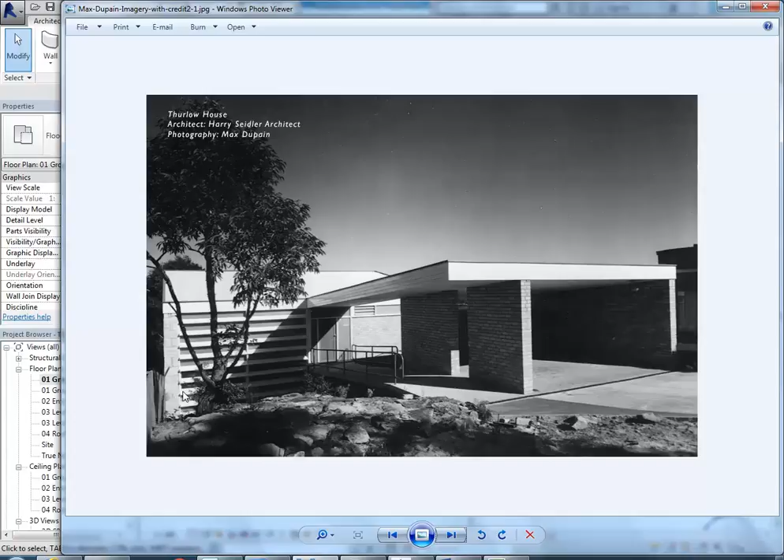Okay, so here I've got the ground floor plan where you'll see there's a curtain wall up against that living space that is different to all the others. So I'm going to make a new curtain wall type for that.

But then the curtain walls that you have adjacent to that can be used, or can be done using that curtain wall that we made right at the beginning, that Seidler wall, because it's just a plain wall with a frame going around it, and we can add the frames in.

So make sure you've got that wall type set up, and then when you go to the wall tool, you can choose that Seidler curtain wall.

If you haven't already made that one, I'll just show you the setup. So by going to edit type there, you'll see - actually if you did it earlier, I did originally have some settings in there for the vertical grid and the horizontal grid, but I've taken those out.

So make sure they're both set to none, and then the mullions need to all be set to the 50 by 150, not the new thinner one that we used.

So this one has a bigger frame. That's the setup for it, and so that's the name, Seidler curtain wall. You'll need to use duplicate to make that if you haven't done that already.

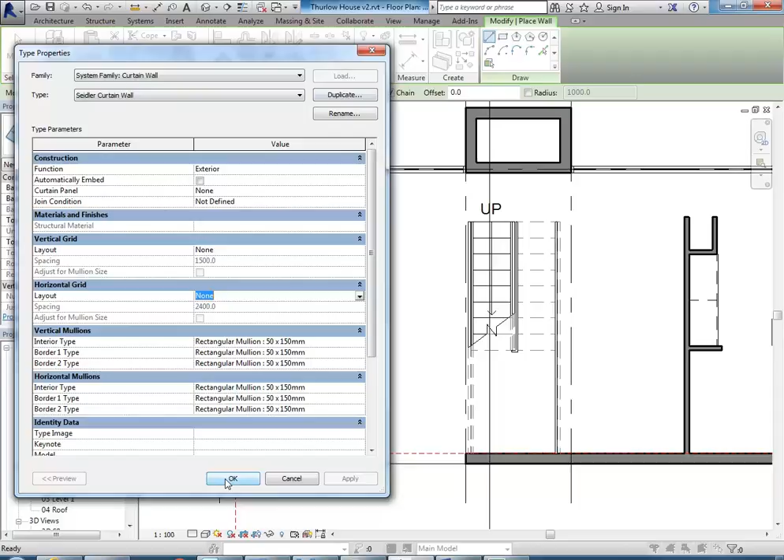And I'm going to set the height there up to 04 roof, and then I've got my top offset there on -150, so I'm going to make that 0 as well.

Which top offset? In properties. Top offset. Mine's at 0, is it? So you might not have changed yours.

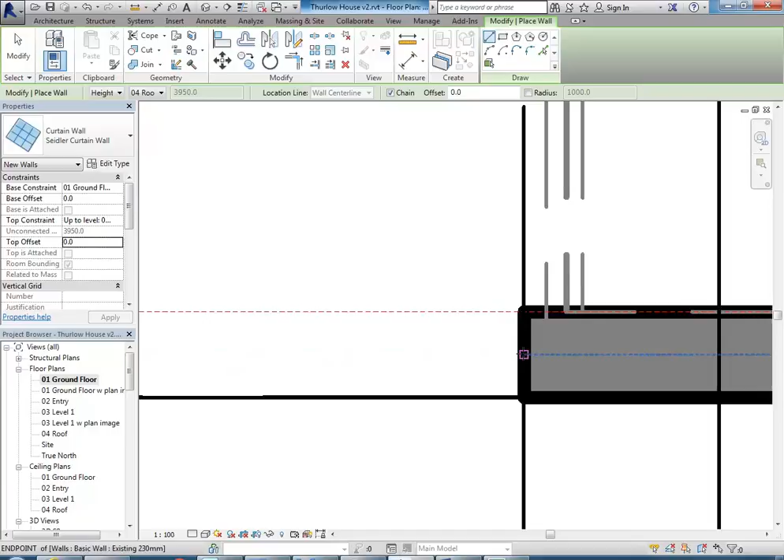So that's it. And so I'm going to start on the middle of this wall over here next to the entry, and then come across to the left all the way up to the wall at the edge, not almost on the edge.

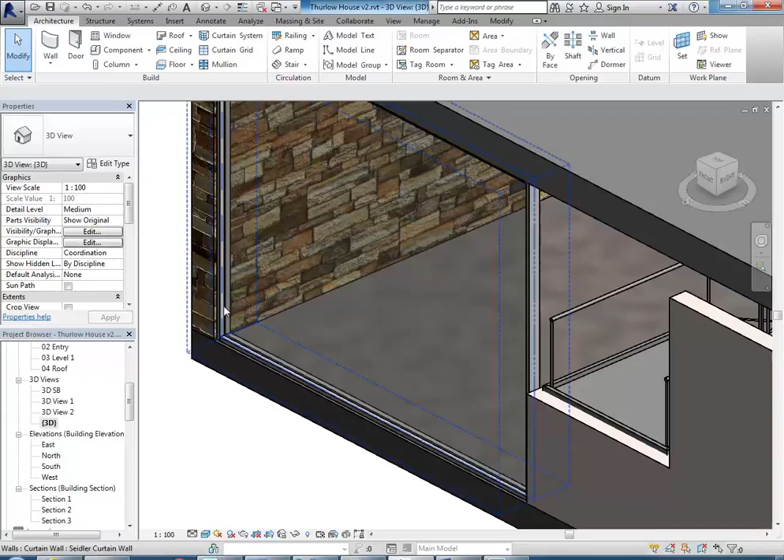So I'll show you then in the 3D view. At the moment it's just a plain glass panel with the frame going around, and so I'll put in those other panels afterwards, just in a moment.

But before I do that, I'll do the others. So the next one, I'm going to go to the entry level, and now I can see the curtain wall I've just made, and I can go back to the wall tool.

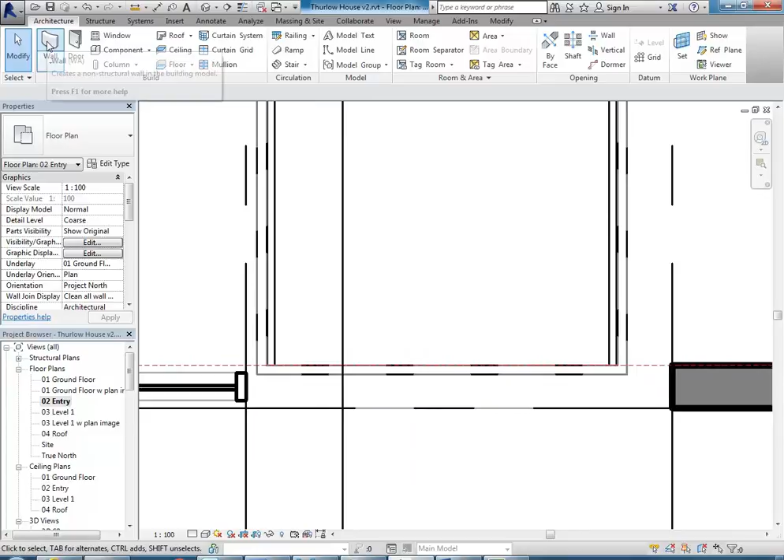And this time I can leave it on - sorry, I'll check the height there, so I'm going to make sure the height goes up to 04 roof, and then going from the middle of the wall over there on the right, and then across to the left up to that curtain wall I've just drawn.

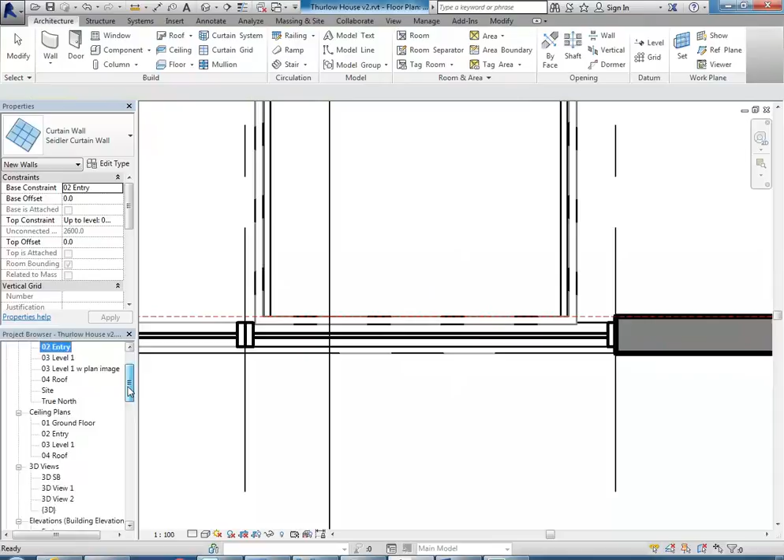So again, now looking in the 3D view, you can see again it's also a plain panel with frame around it, but it starts up higher because I've started on that entry level. So you started on the entry level. Yep.

Oh yeah, so just check your properties. So if you just go into edit type, just make sure you've got the horizontal grid and the vertical grid both set to none. If you have any options in there, it'll...

So if base constraint is level 02 entry - does that mean that's where it finishes at the bottom? Yeah, that's where it starts. Or starts, and then goes up, and then you change the top to 04 roof? Yeah, that's right.

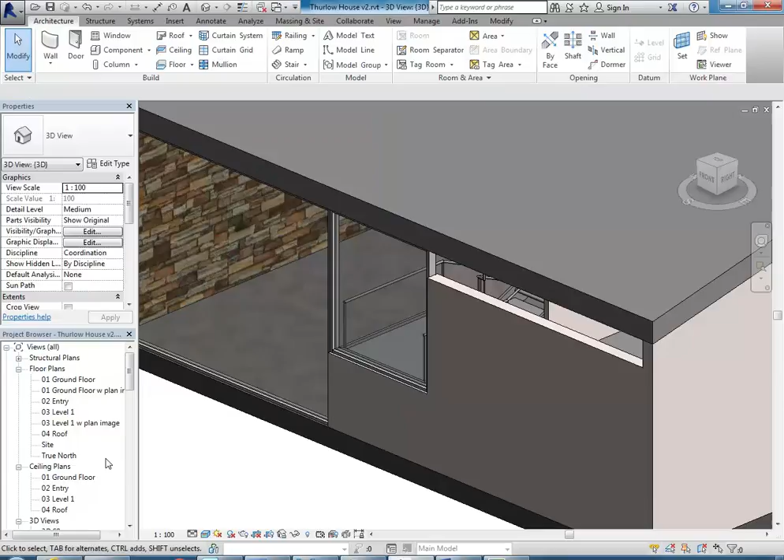Okay, so now I'm just going to look in my south elevation to check the height. Ooh. Yep, 2100. That doesn't touch the roof, but I put it to level 3.

Okay, never mind. Oh, you might need to check the height. But you can adjust that afterwards, as long as it's basically in the right place.

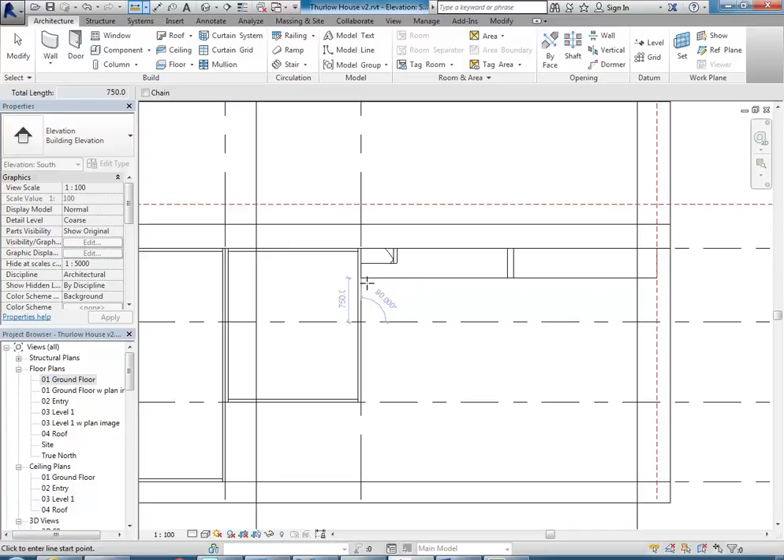Okay, so this next one, well, it's really a window, but we're going to use this curtain wall tool for it as well. It's 2100 above the entry level, but 750 above level 1.

So I'm going to go to level 1, and then using the wall tool, this time I'll put in a base offset of 750.

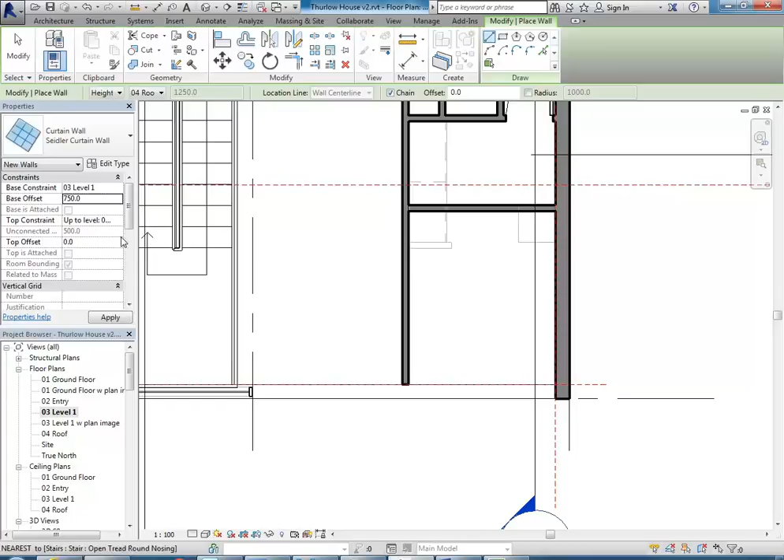And then to make it easier to line up, I'm going to draw it from the left this time. So it's really important there that it's right on the centre of the mullion, not the centre of the glass. The centre of the glass is just a bit below that, but the centre of the mullion should be an endpoint there.

And then as you go to the right, you'll see the glass is going to the other side. So you have to press space to flip it to the right side so it lines up with the glass from the previous wall.

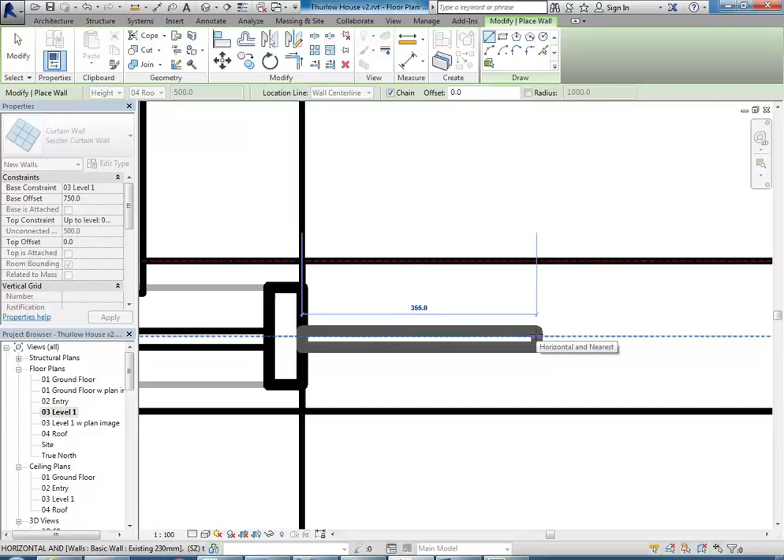And then I'm going to go all the way across to this wall here. So hopefully you can see why it's easier to draw it that way, because there was no middle for me to get on that side. So left to right is the easiest way to draw it, but just need to remember to use space to flip it.

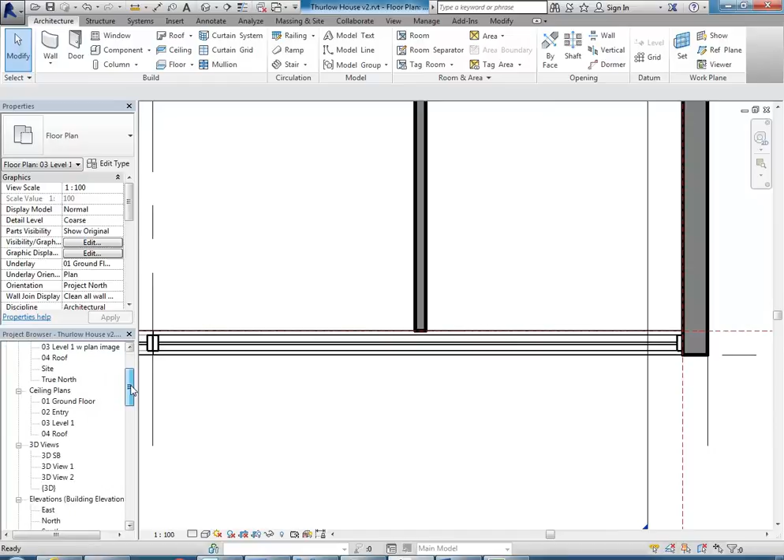So yeah, this is the - well, it's above the kitchen. It's way above that level. So it's really a window at the top of that wall. Yeah.

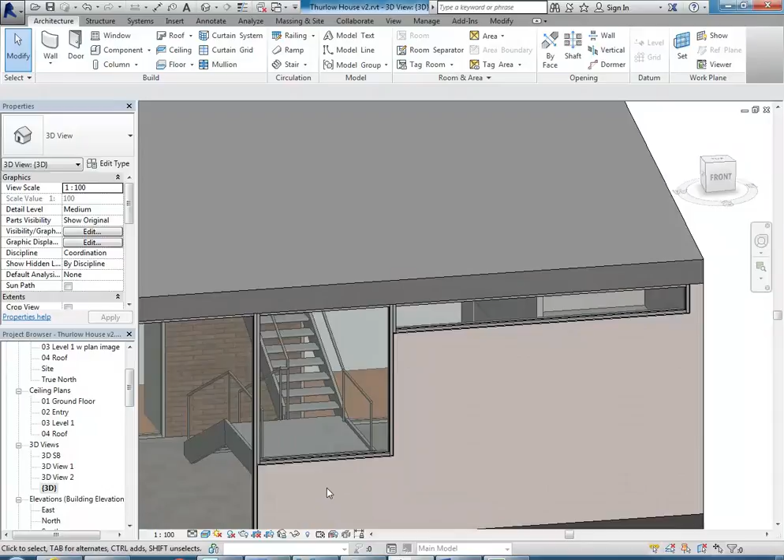Level 1 with the base offset 150. Oh, sorry, yes, right, 750. Yes, but I'll do it.

And so once you've done that, then you can use the grid tool to put in the extra divisions that you need.

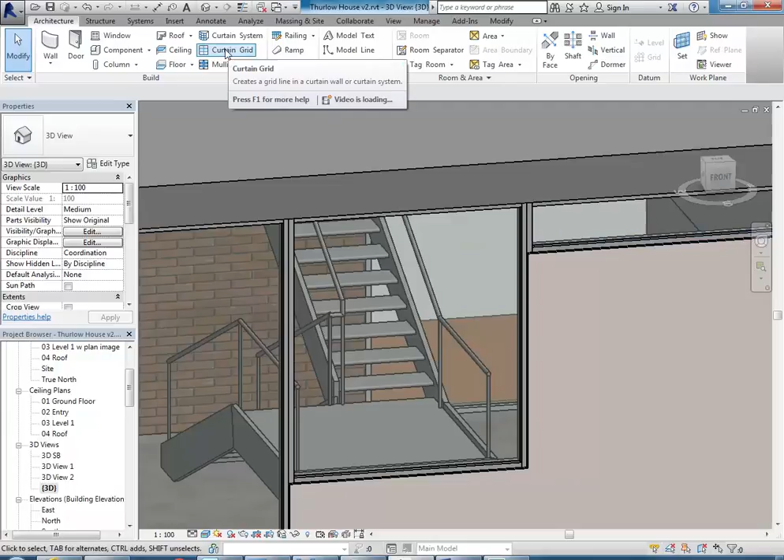So, using curtain grid, I'm just going to place it roughly in line with the other one. You can see there it's just gone a little bit below where it needs to, so I'll bring that up in a minute. But as you've done before with the grid tool, generally you can just place them roughly where they need to go and then fine-tune the measurements afterwards.

So now I need 2 vertical grids. And notice also with this one, it's putting a mullion on automatically because that's all been set up in the wall properties.

So here I'm going to change it from all segments to 1 segment. And then just choose 2 sides of my door.

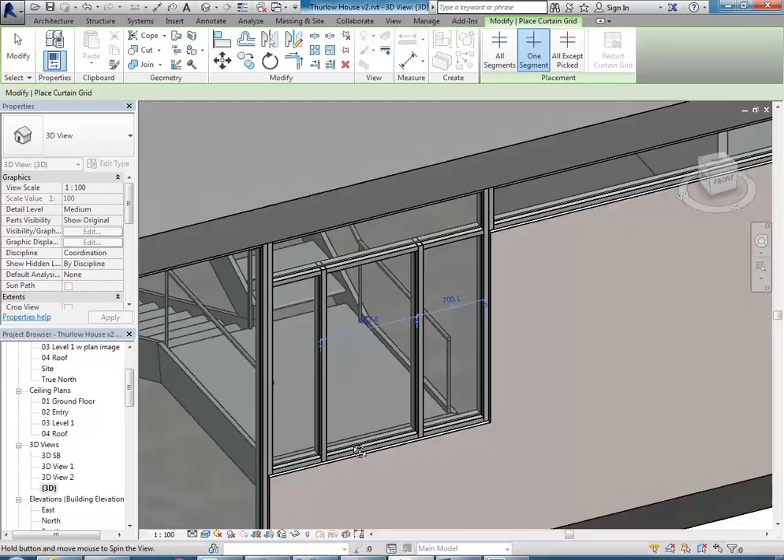And then we've got another one up here for, well, for the vent really. Something like that.

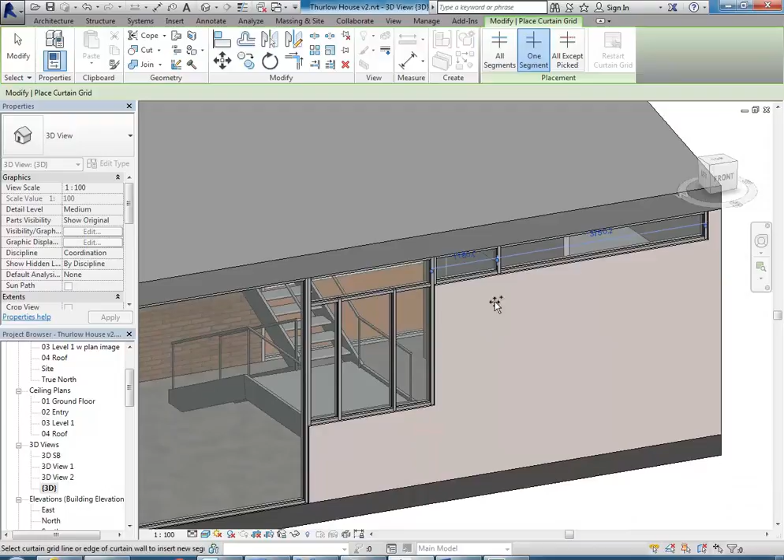And you can change the measurements as you go, or you can press escape and then come back to any, well, over the mullion, and without clicking anywhere, if you press tab, if you're in the right place to find the grid, it'll pick it up, but sometimes you just need to move the cursor around to find it, and I'm having trouble there finding it. Oh, there it is. Okay, so I've finally got it.

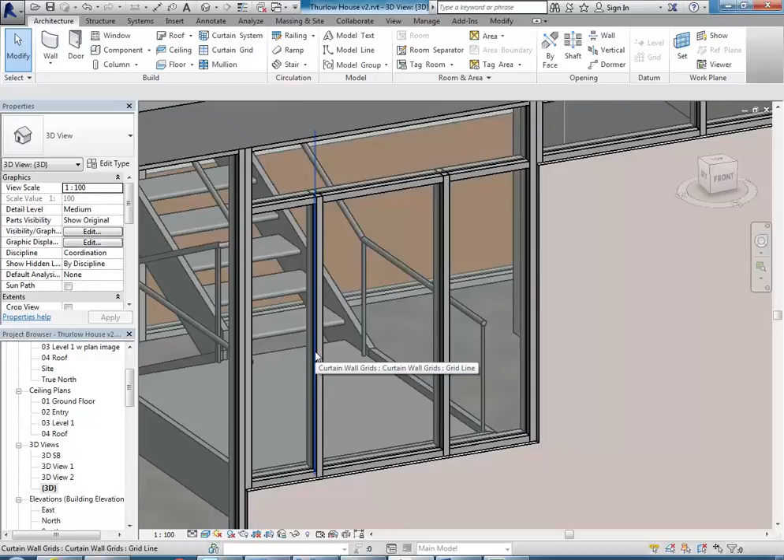So that's one way. Another way is to do a crossing window right to left going across all of those things, just like that. And then use the filter button.

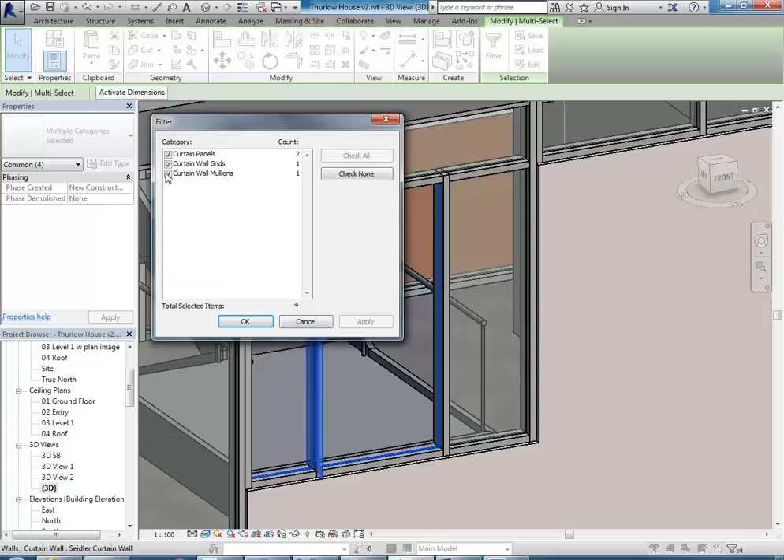What would the door be? Oh, the door itself will be 900 or a metre, but then we've got the framing because the grid's centred on that, so make it 1,000 and that'll make the door 900.

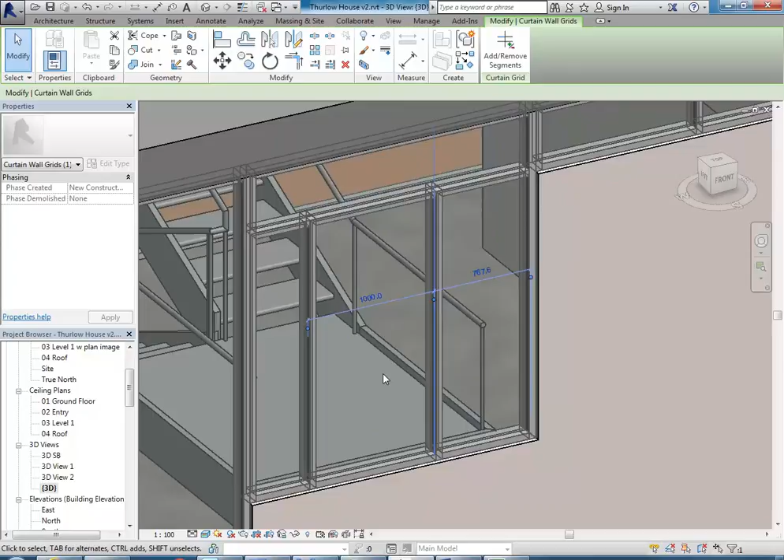So I'm just going to make this size on the left there 500, and then I'll go over to the right and get the grid line on the right hand side of the door and make that 1,000. Don't need to be too precise because the door will fit in no matter what. Yep, 500 and then 1,000, yep.

So you need to use tab to find the grid line, so it might take a few goes. Just there, I'm moving the cursor over the middle, but it's not the middle of the front of the mullion, it's the middle of the centre of the mullion. Yeah, so it's about there. And then tab, and eventually you can see that's my grid line now, and so I'll click then to select it. Yeah, that's it. So what was it?

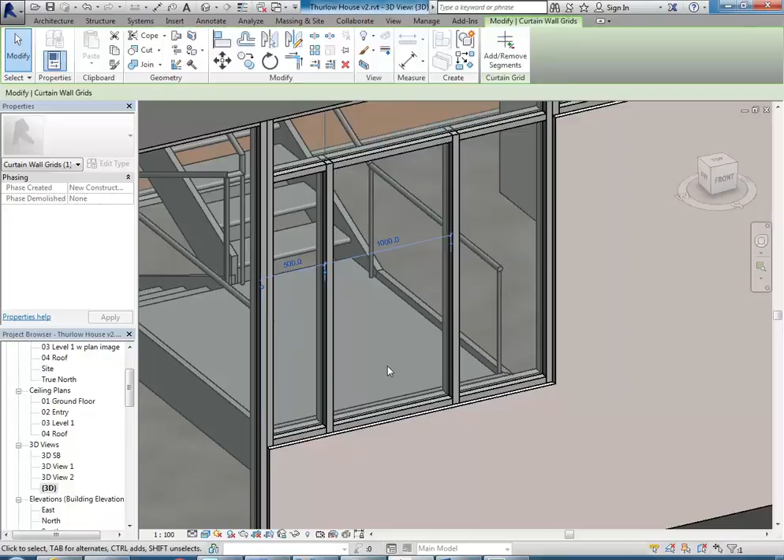500, 500 and then 1,000. But to put the 1000 in, you've got to select the grid line on the right of the door. So not... The which one?

Oh yes, you can always add mullions in manually as well.

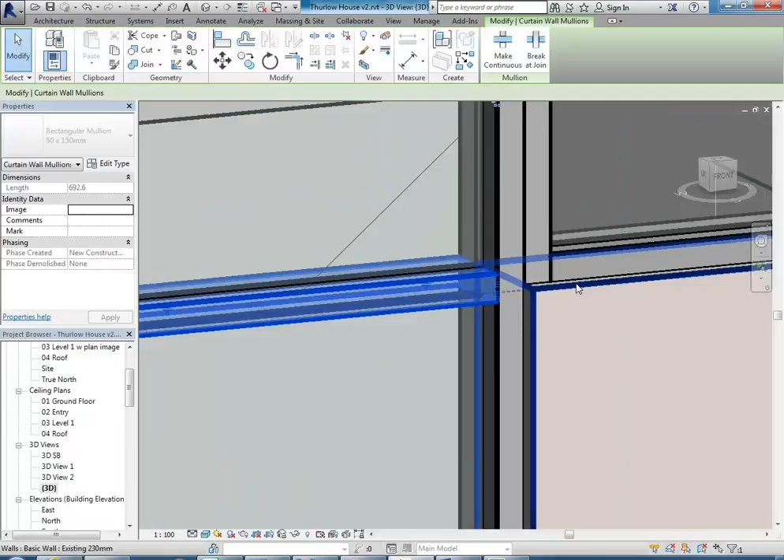So the tricky part here is that you've got this grid line lining up with the top of the wall there. Right, so that mullion there is centred on the top of the wall, and we want that to be raised so that it's in line with the mullion above. So that's got to be, oops, sorry, if I get the grid line there it is. So that will be 2150.

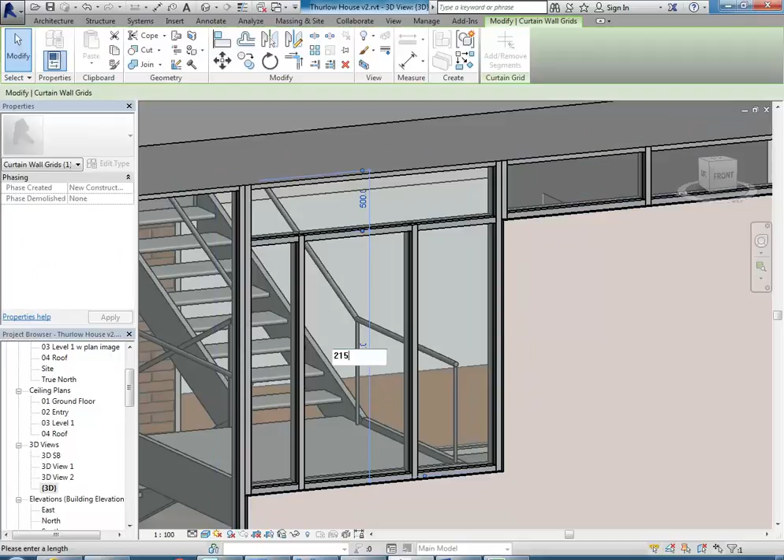Oh no, that can't be right. So 2100. Sorry, what am I saying? 2125. Sorry, not 2150. 2125.

Half of the mullion size, and that will put it exactly in line with the mullion over there, just to make it neater.

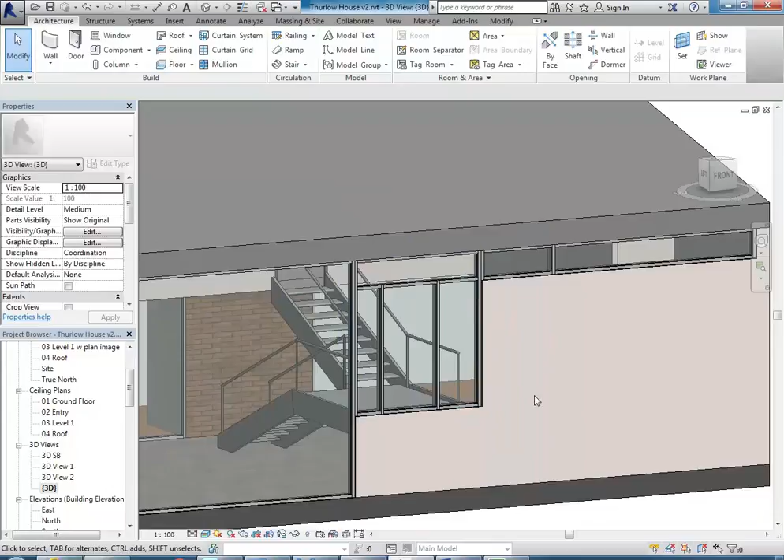So don't worry if those measurements aren't perfect. You can fine tune those at any time. But this is the most important thing: once you have those grid lines in, you then need to put the door panel in.

And so if you haven't done that before... You said 2125, yeah.

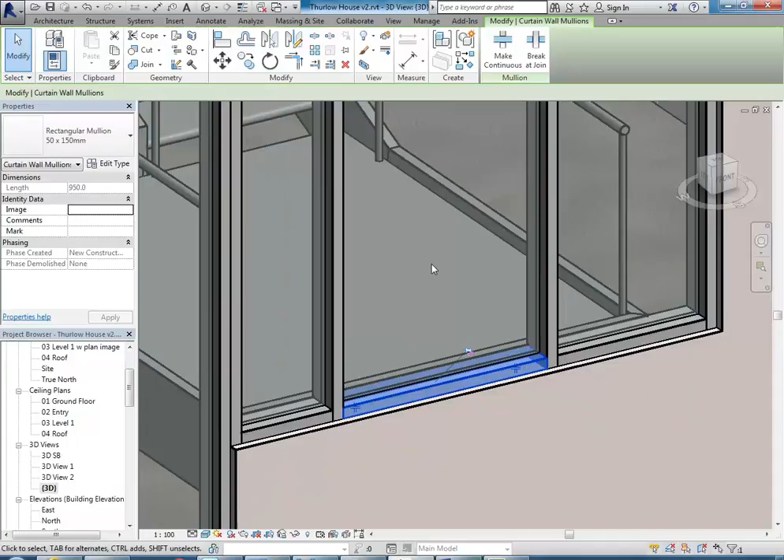So this mullion here needs to be removed first. So I'm going to select it, and that should be fairly easy just to select, but you might have to use tab. And there you'll see it's got a pin icon. That means it's locked, so I'm going to unpin that by clicking on that pin, and then delete on the keyboard to get rid of it.

So now I've got a panel of glass going all the way down to the bottom, and I'm going to use tab then to highlight that and then select it. Yep.

And then in properties you should see 'system panel glazed' as the type. That means it's a glass panel. I'm going to go to...

Edit type, and show you the doors. There's actually a bit of a bug I've noticed in Revit for the last release or two. Sometimes the first time you go to load panels, this button won't come up the way it's supposed to, and that's what's happened to me here. Now if I duplicate, sometimes that fixes it—no, but it's not doing it this time. So I have to show you another way of getting the panels to come up, and it's fairly easy.

All you need to do is go to the Insert tab, and you can do this anytime. You don't need to have the walls done—you can do this before you've even started to make your walls. So just go to Insert, then Load Family, and then go to Curtain Wall Panels.

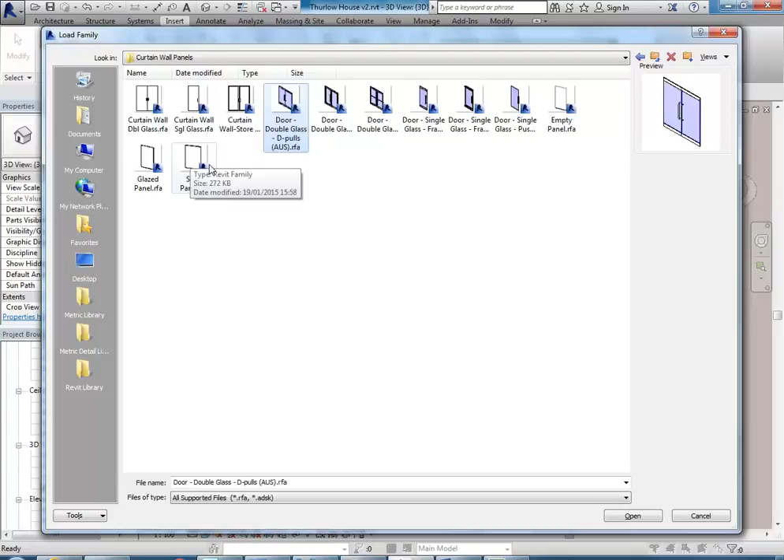I just want a simple one. They don't have any solid panels, but they've got single glass panels, and that's what I'm going to choose—so just the second one there, curtain wall single glass, the second family there. So I'm going to double click, and now that should have fixed the problem as well as loading the family we need.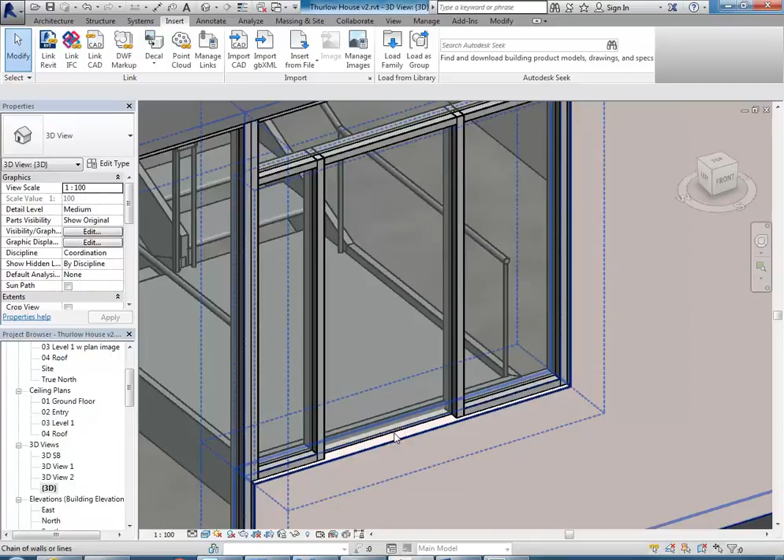If I click on my glass panel—again using tab first to highlight it—edit type, and now notice the load button's there. So normally to load in those curtain wall panels you can just click on the load button and then do what I've just done: go to the folder curtain wall panels and then choose the one you want.

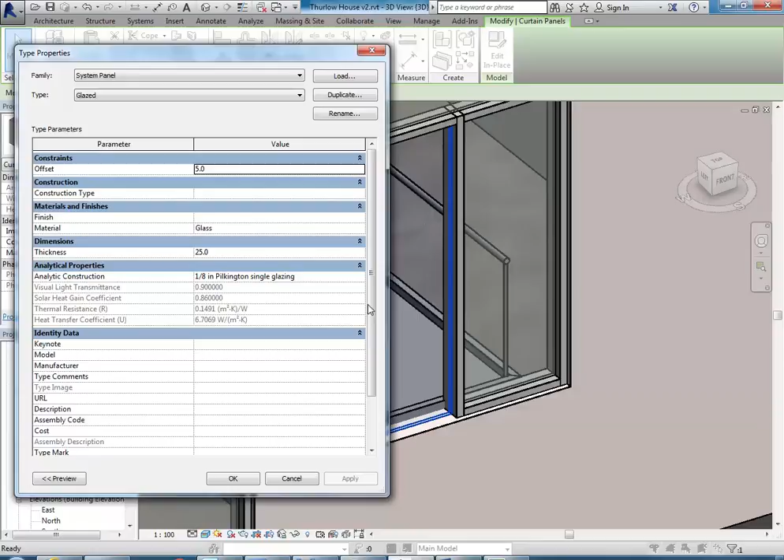So maybe I'll do that just so you can see how easy it is. This is how it should work, and it does—after you do it the first time, it fixes it. So there we go, that's loaded a double door.

I don't want a double door, so back to edit type, and I'm going to click on the list of families up the top, and you'll see there is the one that I actually want that I'd already loaded—it's curtain wall single glass. So I'm going to click OK, and you can see then we've got a glass door.

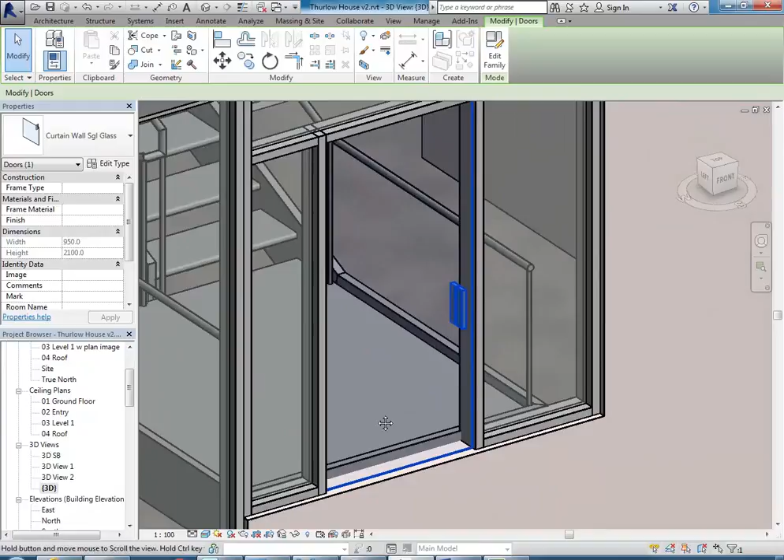Now we actually don't want a glass door, we want a solid door. So I'm going to go back to edit type. Even doors for curtain walls? Curtain walls—so this is curtain wall panels. So I'm going to just go to edit type, duplicate, and call it solid curtain door.

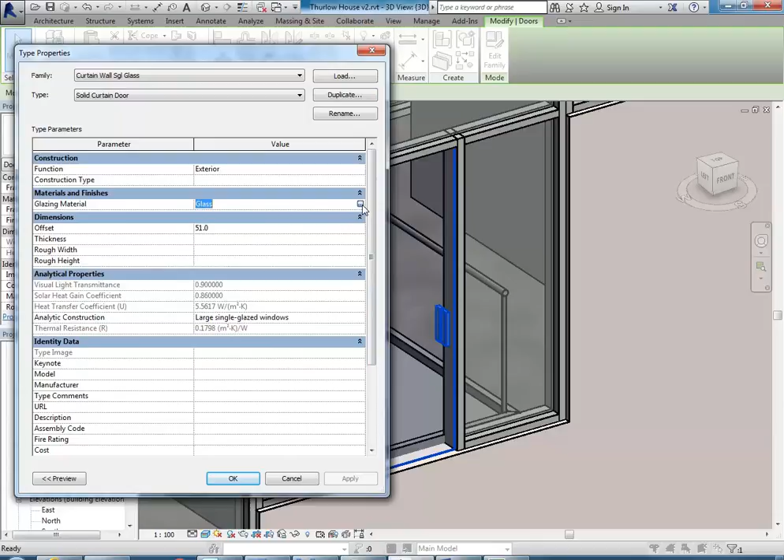And I'm just going to change the thickness, the glazing material to a solid material. So it's glass, and I'll change that—clicking on that glass material, and I'm going to go down and find a solid material.

Okay, so I should have a paint, so it's going through some list there—I've got paints and coatings. Because we haven't done a lot with materials, we've done a little bit, but I'll show you again how to make a new one. I could use that material, but if you want a different colour, I'll show you how to make a new one from scratch.

Easiest way is to make sure you've got the materials library panel at the bottom. If you don't see that extra panel, you've got the button at the top there that turns it on and off. So make sure you realise this list of materials is the list in your project. When you turn on that extra panel, that's your library that you can use to load materials into your project.

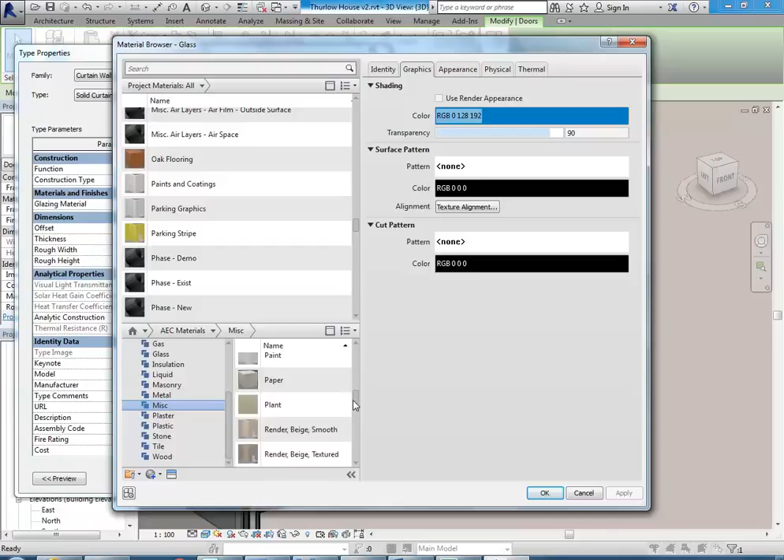Now if I click on the little arrow next to home—this is the thing most people miss, you've got to click on that to see the folders—AEC materials is actually a really good one. AEC just means architecture, engineering, construction. So when you go down, you'll see, I think in miscellaneous, pretty sure there's a paint there. Okay, so there's paint, so I'm just going to click on the arrow to load that in.

Right click on the new paint at the top and go to rename, and call it paint. Well, it's a black and white photo, so we can't tell the colour. In fact, I assumed it was solid, but because normally they would be—but it is solid. Yeah, just look—oh, so it's blue. Okay, let's do blue.

Green. Maybe they painted it. Well, I think blue would be better. So let's do blue. I'm not a fan of green at all as a colour in your colour schemes, because it's not a naturally occurring colour, believe it or not. I mean, it's been made a lot lately, and you see it in nature all the time, but in traditional paints you don't really come across it all that often, so I tend not to use it. Some people like it, but again, I'm not a fan, so I'm going to make it blue.

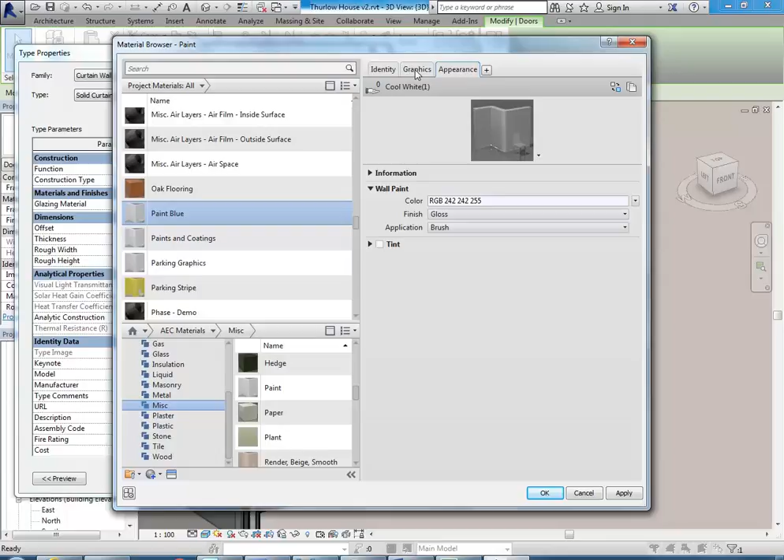Paint blue, and then here you can see it's still got the white thumbnail there, so we know it's still that colour. I'm going to go to appearance and change the colour there. So I'm just going to go to the colour swatch here and choose basically the closest - well, that is just full blue - and you can always adjust that brightness there if you want to.

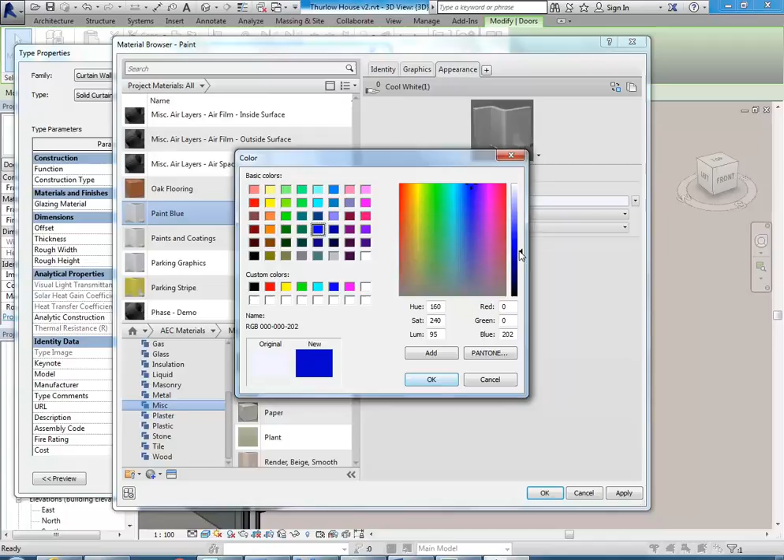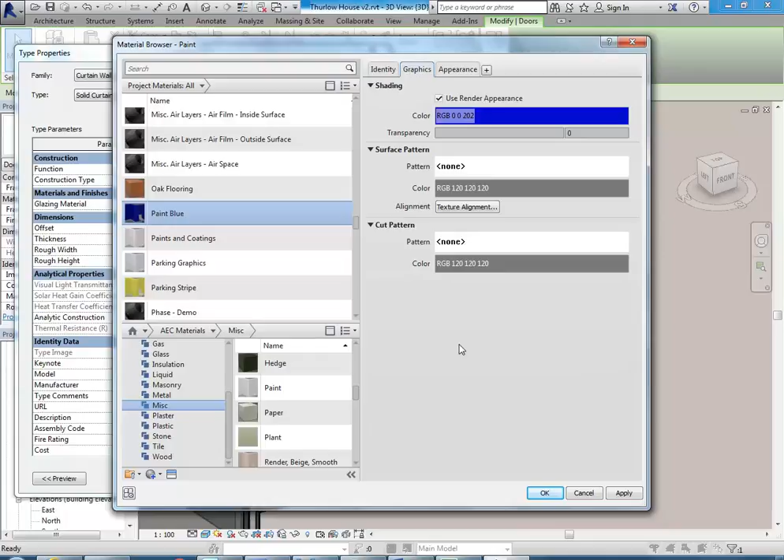Okay, so the swatch over here has updated, but we need to go back to graphics and tick this option, use render appearance, which will match the colour. Right, so by doing it that way, by doing the appearance first, it saves you a step, so you don't have to do it in graphics, just tick that option there. So that's it, done. If I click OK, OK, solid panel.

And that will do for now for the door. So I'll do another video on loading the panel in. I think I'll just actually show you how to put the divisions in, and I'll show you how to put the panel in afterwards.

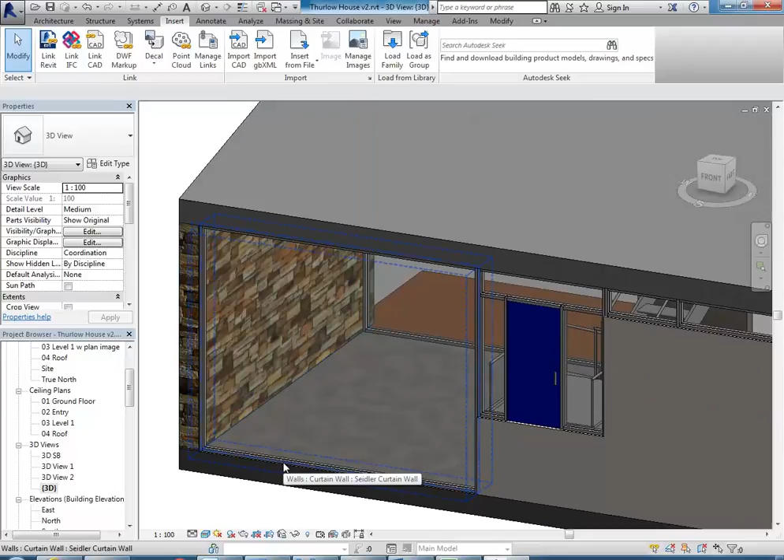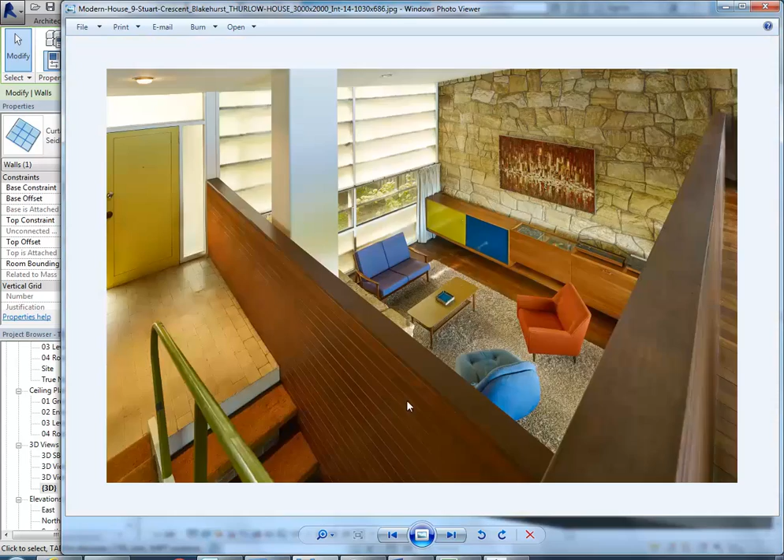So here for this other wall, we've got these unusual panels which are a bit hard to see there. You'll see them on the photos on the inside. Here we are. Right, so I'll give you those. I'll give you a family for those. They're actually, I think they curve slightly. Or, oh, has anyone had a close look at those? They're interesting. So it looks like they curve. I could be wrong.

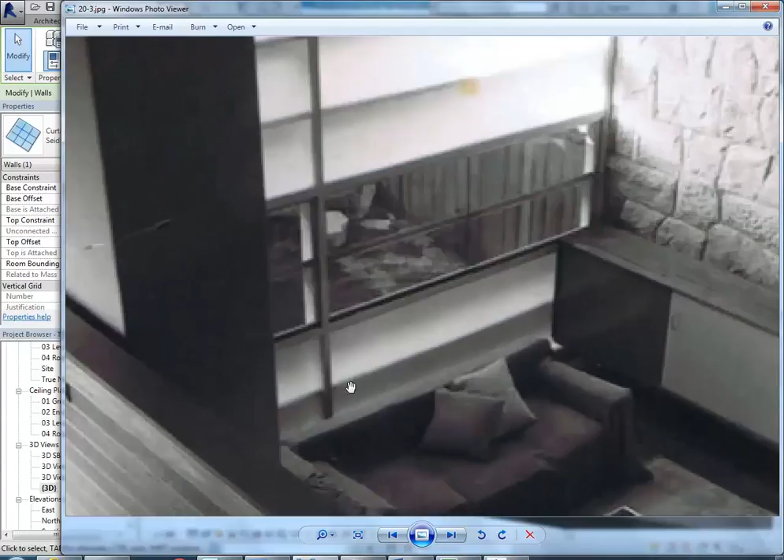It's here, you can see. Could just be the lighting that's making it look like that. But they're definitely opaque anyway, and so we'll need a special panel for those. Here we go, so you can see there, that looks like it's a different material anyway, and it does look like it curves. So that's not a problem. If it does curve, I can make a family, and I'll give that to you.

So for now though, I just want to get the divisions in that we need. So I'm going to, with that wall selected, go to Edit Type, and duplicate, and we'll call it Curtain Wall Panels. And so here you can see how many panels there are. So you've got 2 below the clear ones. So 1, 2, 3, 4, 5, 6, 7, 8, 9 altogether.

Right, now I'm just going to click OK so I can save the file, because it does seem to crash sometimes when you're doing these things. So I'm just going to make sure I've saved it.

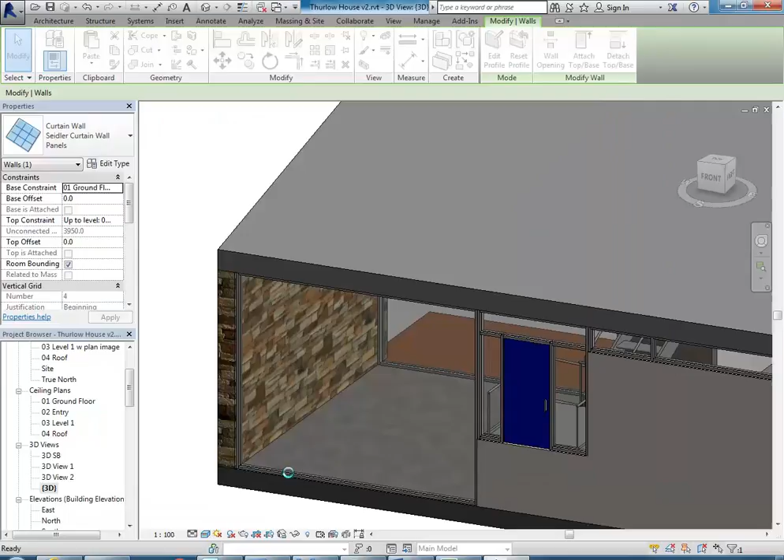Okay, so with that wall selected again, I've made my new type, so I'm just going to go to Edit Type now and change the options, which are to set vertical grid to fixed number, and then horizontal grid to the same fixed number.

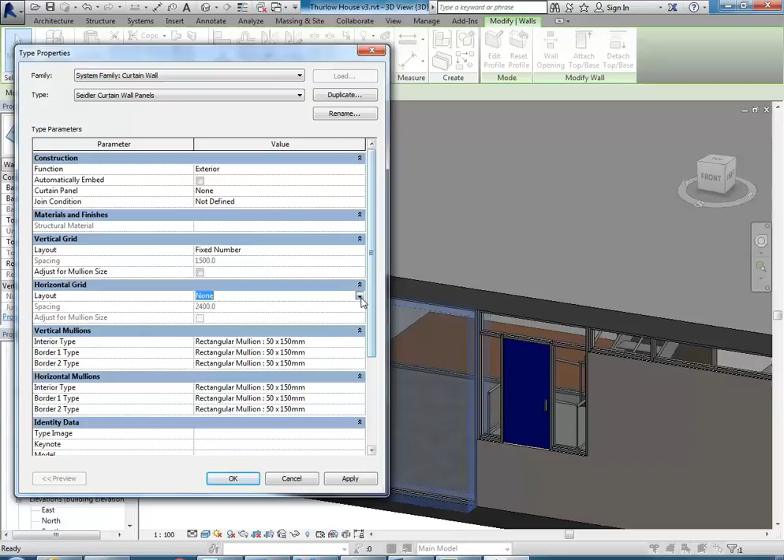Okay, and it's put in a pretty arbitrary setting there, but I'm just going to go down, and you can see, so vertical grid is on 4. I want that to be on, is it 9? I'll press apply. And, oh sorry, so it always does it the opposite to what I think it should. So vertical grid will be 2.

So the vertical, also 1, sorry. Yeah, again, they count the grids, not the panels, so it's the 1 grid line in here. And so it's dividing up to make the horizontal panels, but they call that the vertical grid. And then horizontal will be 9. So in properties, it'll have those.

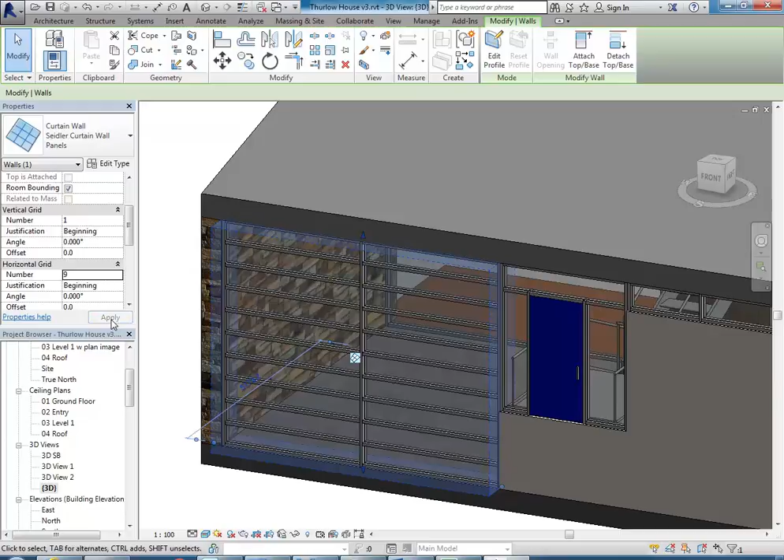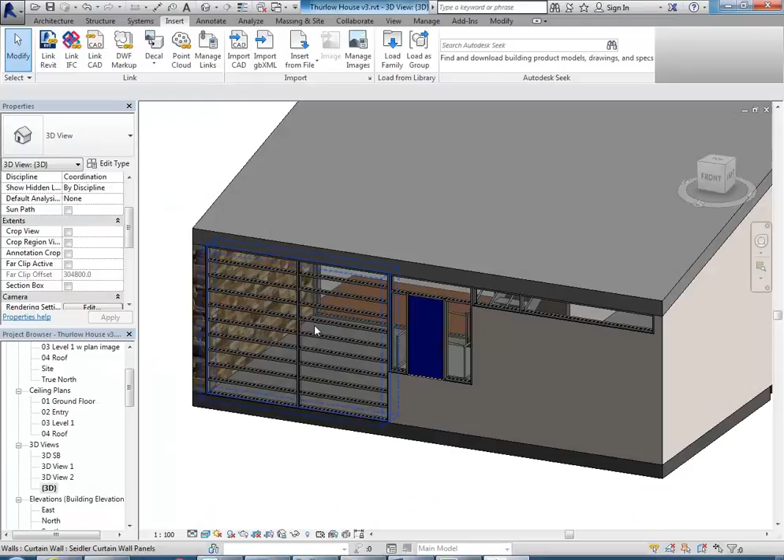Oh, so you've got to check your type. So go back to Edit Type and make sure it's on fixed number. And now, yeah, how good is that? So you can see there, this grid, this mullion is slightly above this one. And that's exactly how it's turned out.

Yeah, so you might have to add them in. It depends how your wall's set up. So I'll show you how to get the mullions a bit thicker. You don't really have to, but if you want to, you can make them look more like they do there. In the interior, they don't look like that anyway, and that's the most important thing. And like I said, the panels as well, we'll look at later.

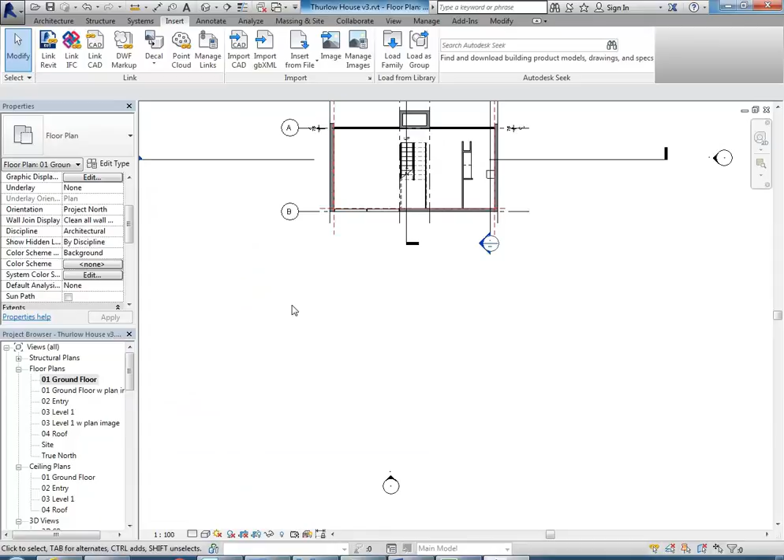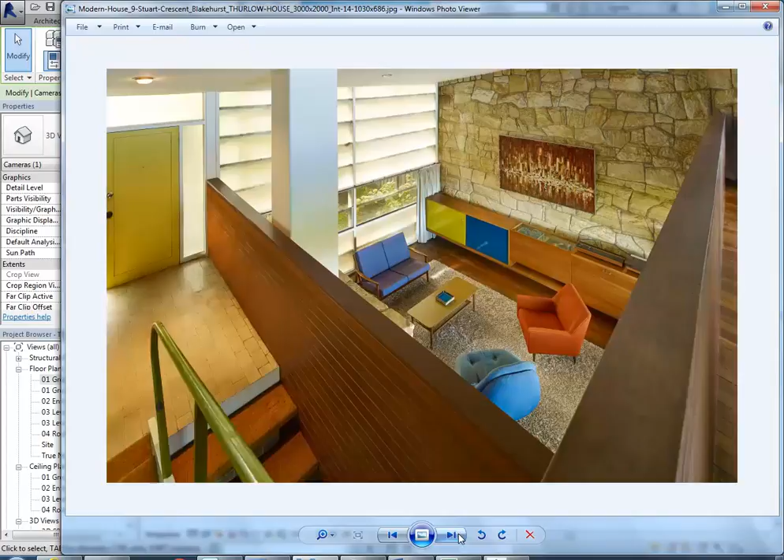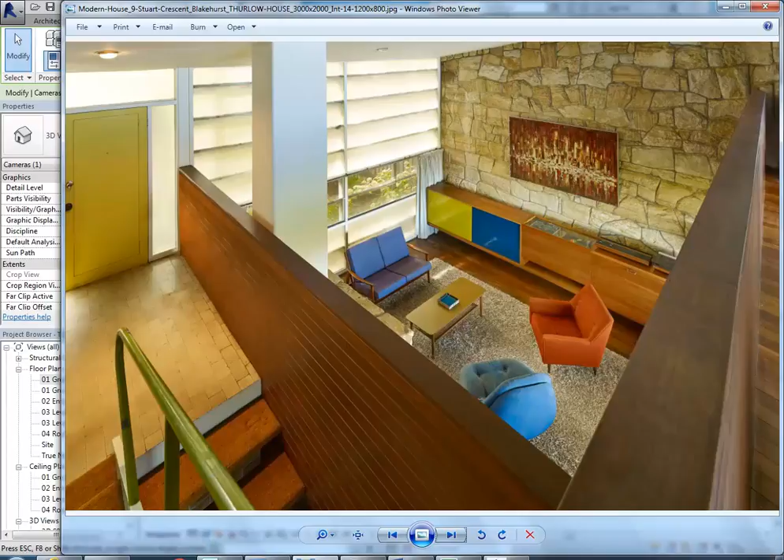For now, looking at the interior perspective now. Okay, so very similar to what you really have. Right, so we've got to put the wall across here, of course, but otherwise it's getting really close.